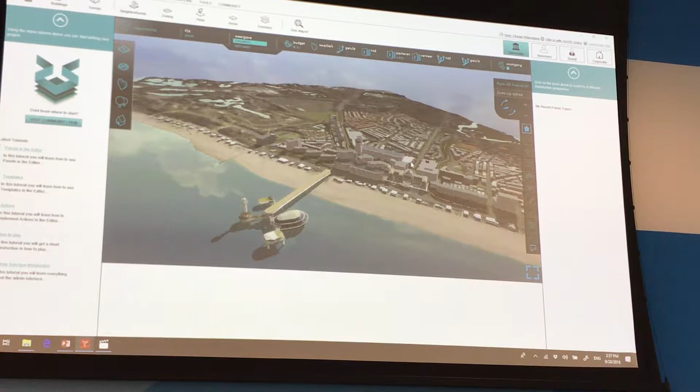Scheveningen, apologies for calling it that way, but geographically it is, right? And what you can do, it's a 3D model, and you can start planning.

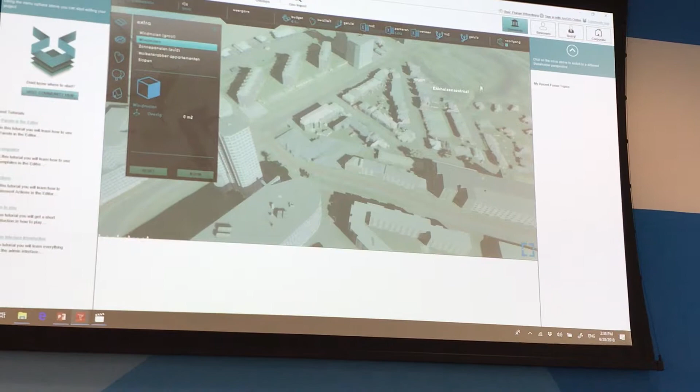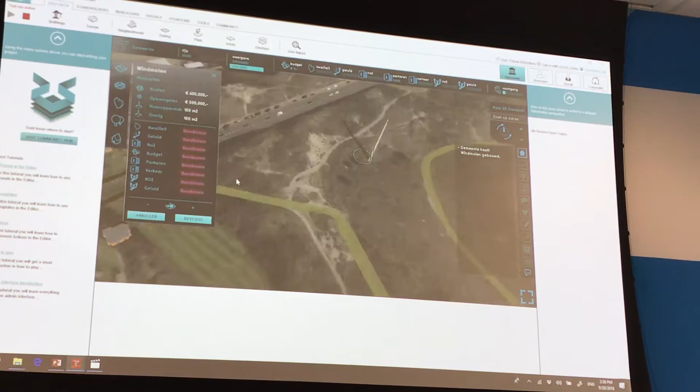You can try a windmill, for example. It calculates the effects of the windmill. You can have a dialogue with the inhabitants of the city on the impact of the windmill.

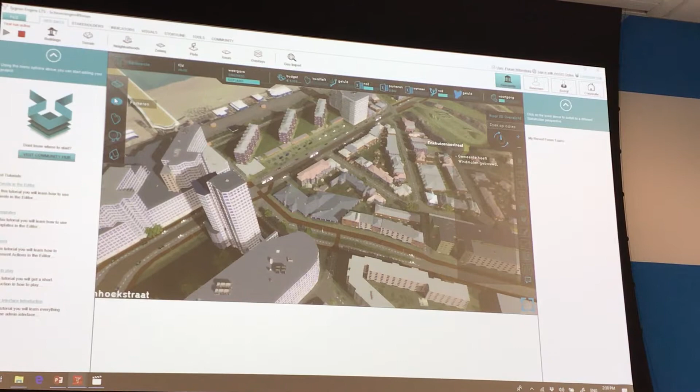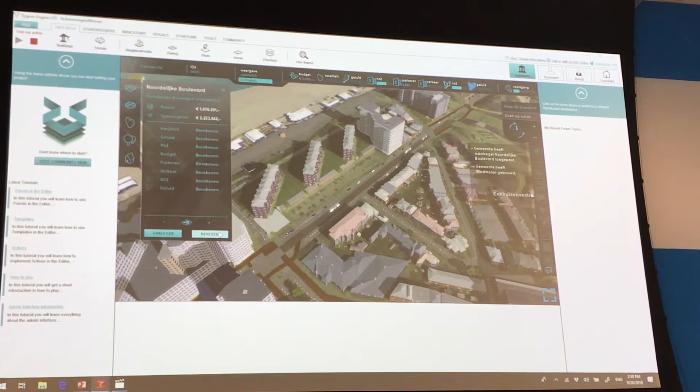Or we could have an apartment building. This is actually an initiative of a project developer. He wants to build a parking garage on the boulevard. He wants to make money with it, and he can upload its plan, its BIM model, and if the attributes are right, which you can as a government request to fill in, it calculates the effects.

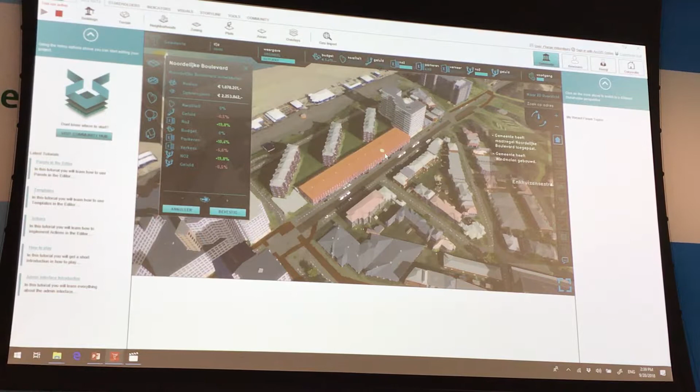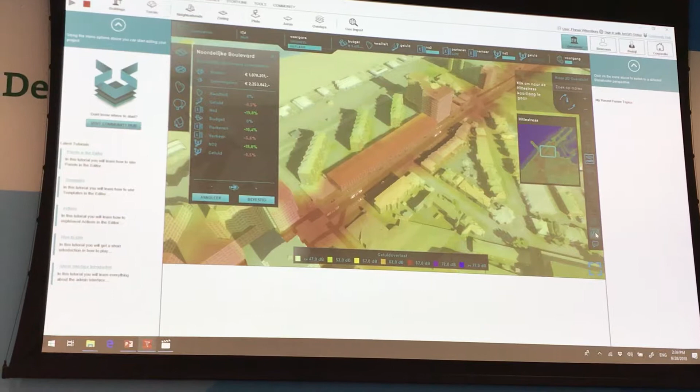And basically what you see here is several information layers on the property rights, on the noise overlay, livability, and indicators where it gives feedback on your policy goals of the city.

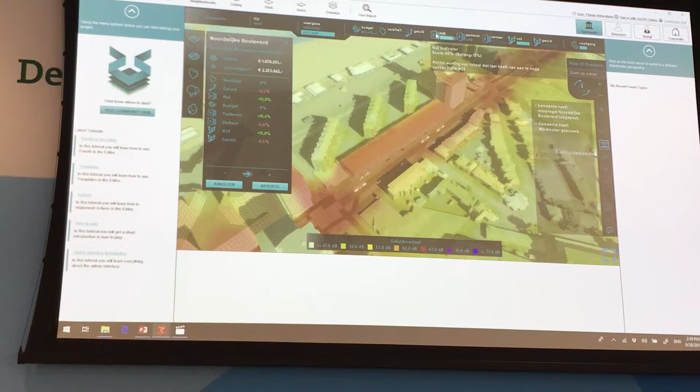So for example, as the city, you also aim for certain parking spaces in the city, because near the beach, especially if it's nice weather, people come in, they need to park somewhere.

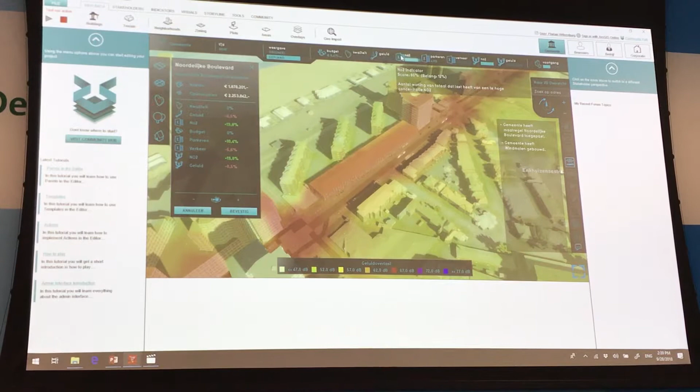One of the issues for the project developer is when he comes to the government, there are all these different departments. And like you said, you have different departments, and they're individually going to check whether due to their policies it is right.

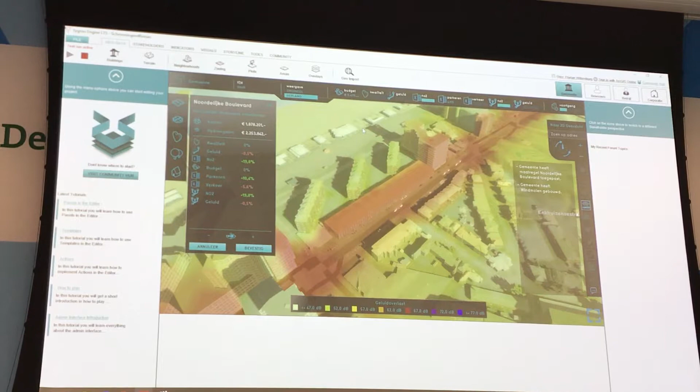And that gives frustration for the project developer, because once he turns it in, maybe 3 departments say great plan, 5 say it's not a great plan. On his costs, he makes an adjustment to the plan. A few months later, 5 departments say great plan, 3 say not a great plan.

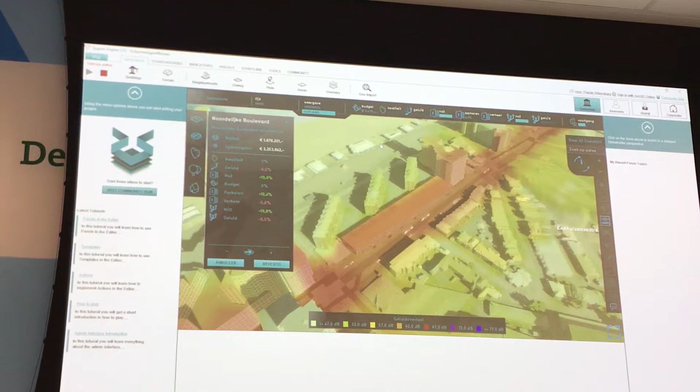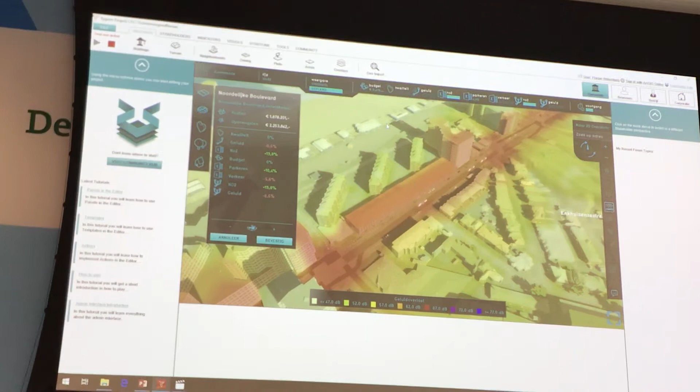This is an actual situation where the project developer took him 5 years going through all these departments. And what you see here is a certain dashboard where, first of all, you have the information of the different departments together, and then you have the indicators which are set by the stakeholders, and then you can directly judge whether the plan is correct or not.

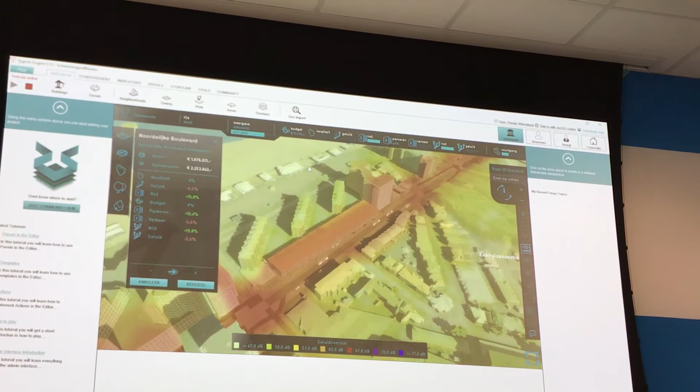And that's the ambition of the Environmental Impact Act, where you have an integrated view where all data comes together, and there's one frontal page where, as a citizen or a project developer, you can load in your plan, and it checks all the different aspects which you have to take into account.

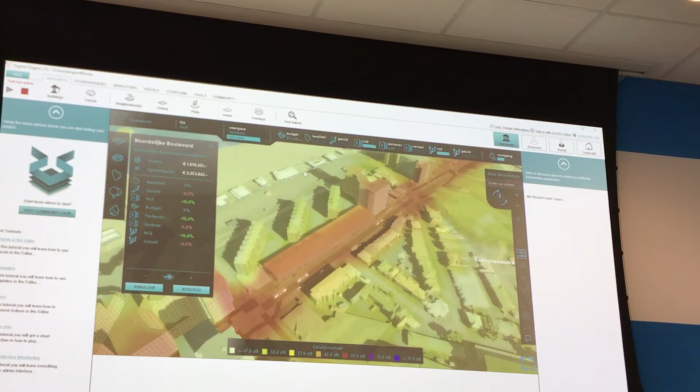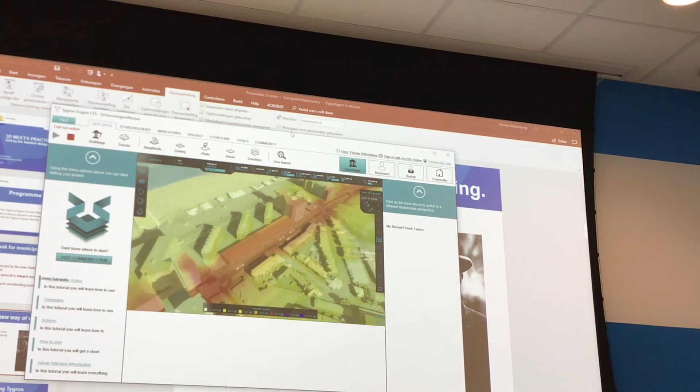There's way more to say about this, also the indicators. One key of this is it gives an overview of the information. So earlier it was mentioned that we have all...